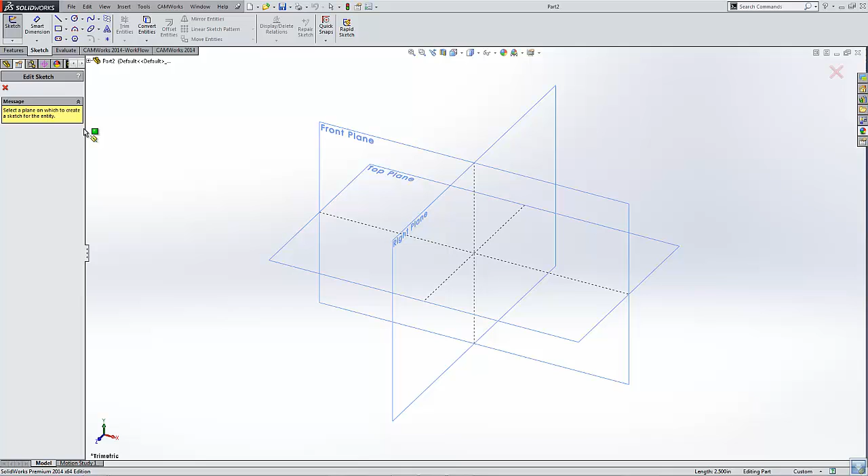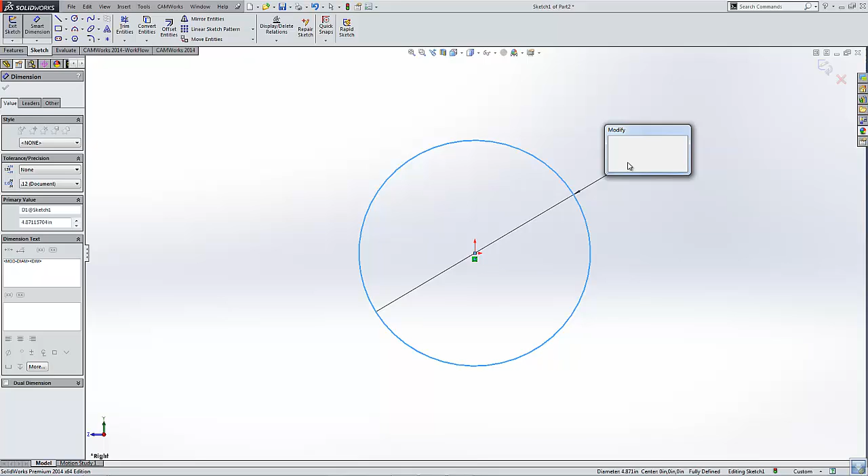So first thing we need to do is open up a sketch. Let's open one up on this right plane over here. See if we can normal to this right plane. There we go. Okay. So first thing I'm doing here is I'm creating the diameter for the cylinder which we will wrap the features around. Call it a 6-inch cylinder. And we'll come back over here and extrude this as a boss. Say 12 inches long. There we go.

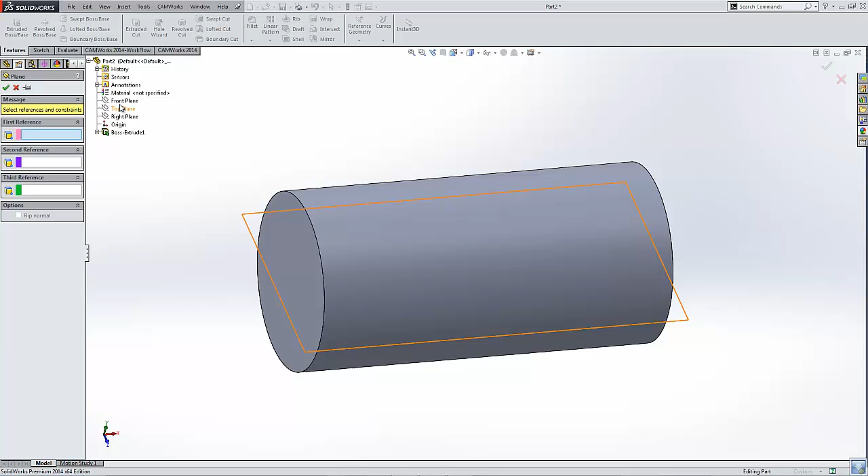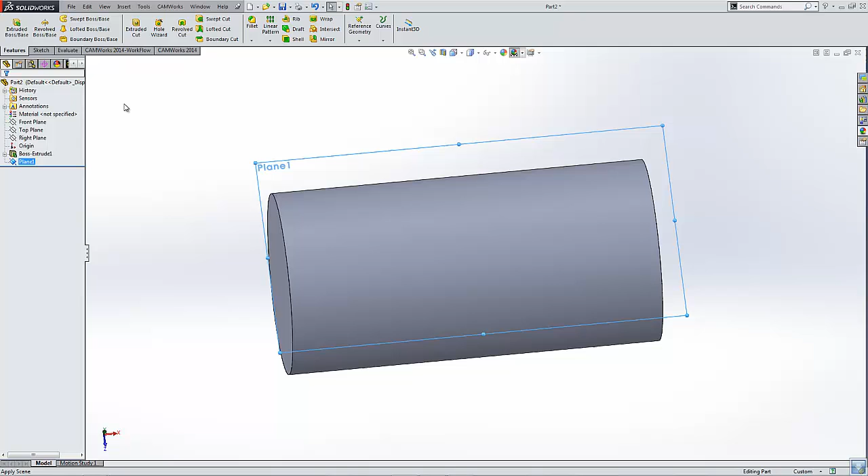So, new part. Need to add a few things here before we can start putting some toolpath on. Very first thing we need to do is get a reference plane that's tangent with this upper surface here. So our first reference is going to be the top plane, and we'll make a parallel mate. And our second reference is this outer diameter, so here we have our sketch plane tangent with the perimeter of the part. Make it a little easier to see there. Right now I'm just changing the color of this face.

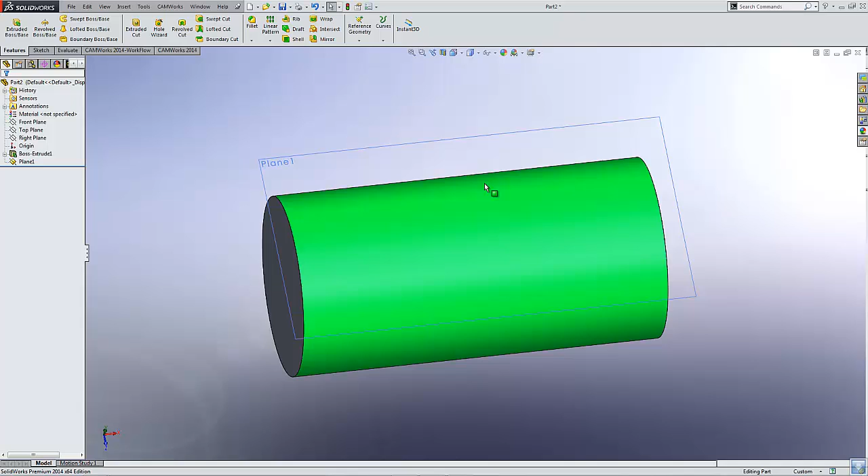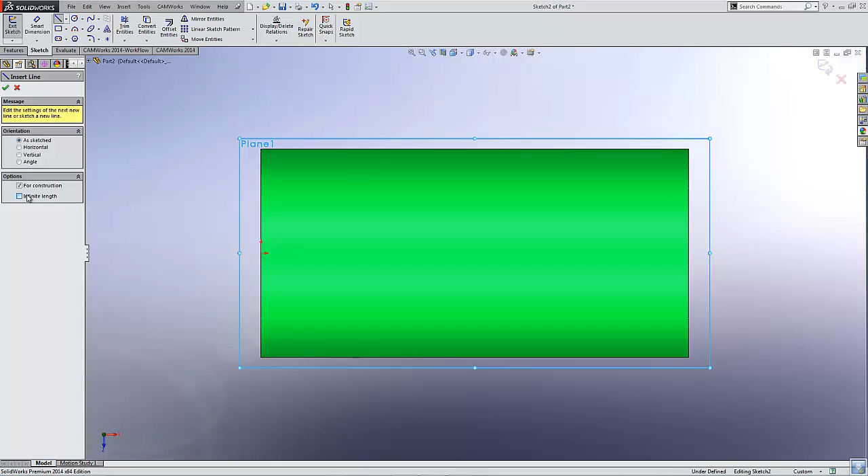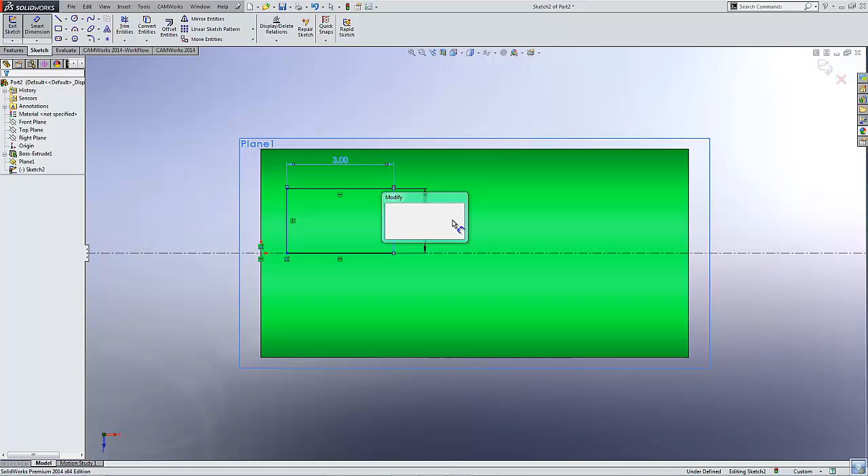Okay. So, what we need to do now is on our new sketch plane, we'll go ahead and open up a sketch. And I'm a big fan of starting out sketches with center lines. We'll go ahead and make a horizontal center line that intersects the origin. Now we can start drafting our features and contours. So I'll make a quick little box here and give it some dimensional information. So 3 inches wide and let's say 2 inches tall. And we'll go ahead and fillet all the corners with a 0.250 radius. So what I'm doing here is I'm modeling what would be the hypothetical top edge of the rotary cutter.

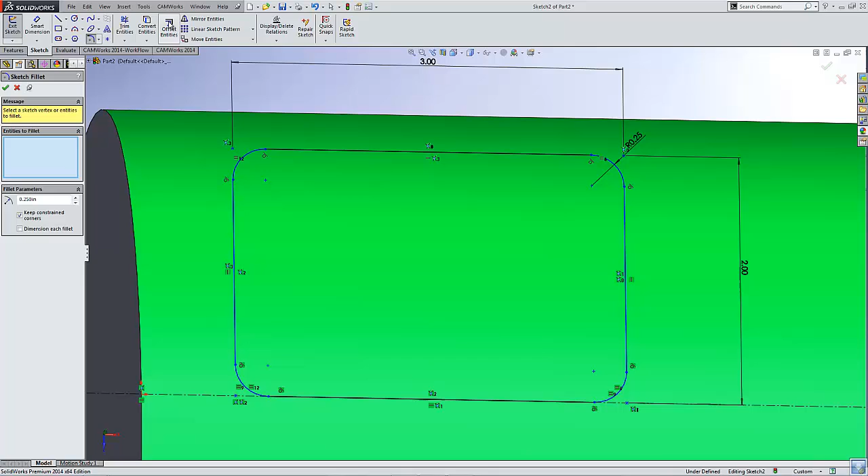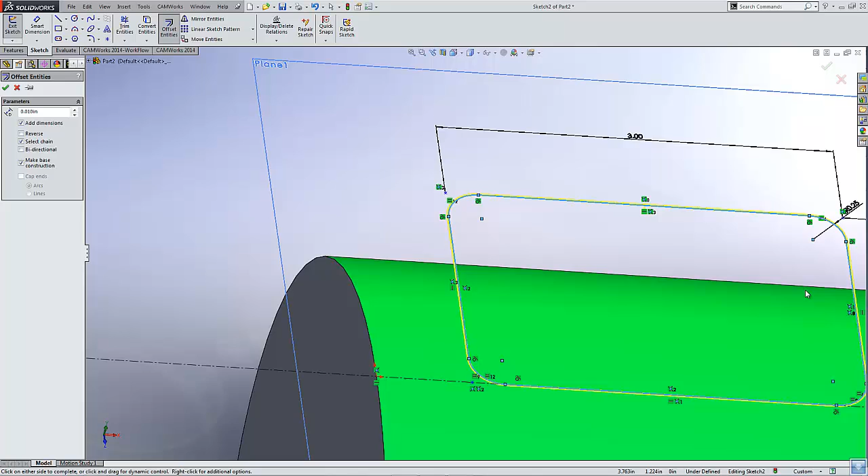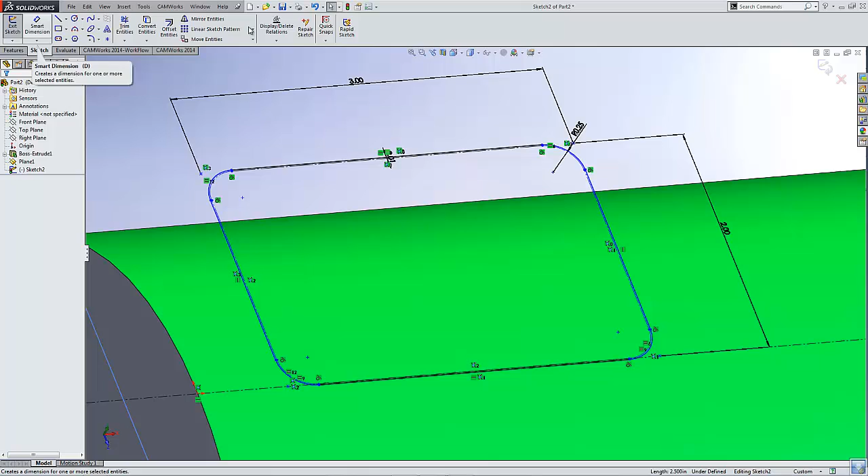So what I want to do next is select all this geometry that we've created, and I want to create an offset of about 0.010 of an inch. That would be the theoretical flat on the blade that you guys would sharpen by hand after hardening. So we'll go ahead and exit the sketch. Oops. Let's do that one more time. So offset that entity 0.010 of an inch. Hit the green mark. Select chain. Offset. That's what I wanted to do. Turn the base construction off. So now we have two profiles.

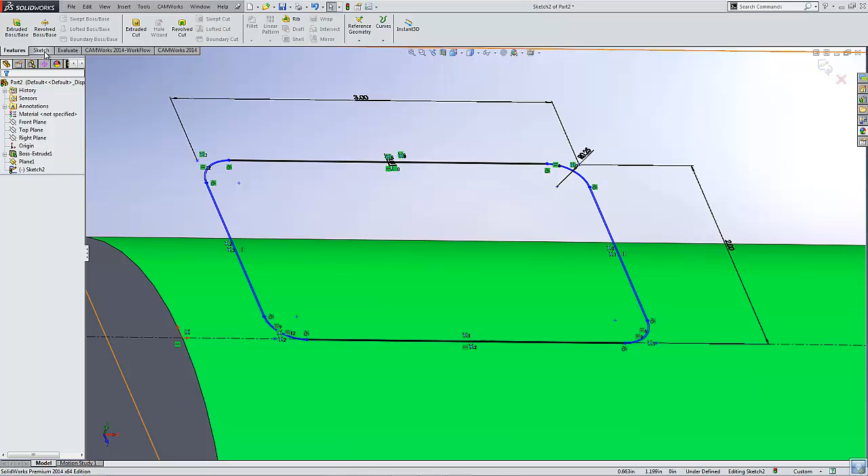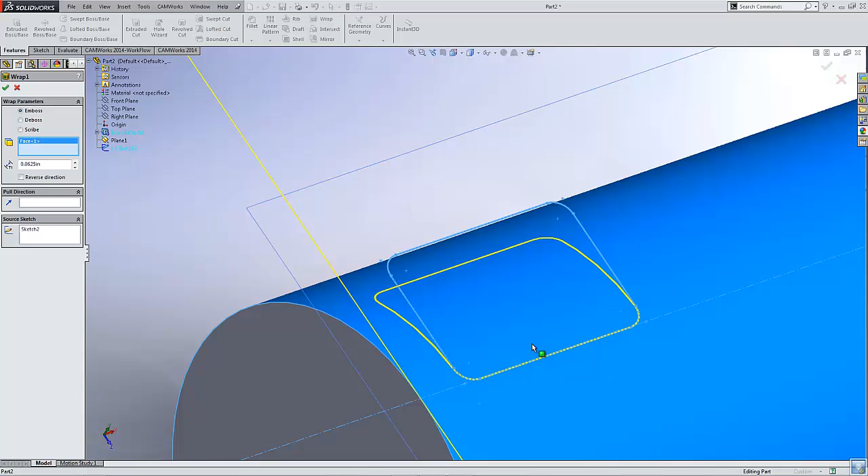So now we need to exit the sketch and create this wrapped feature. Using the wrap command over here on the feature tree, now it's asking which sketch do I want to wrap. So we went ahead and selected our source, and now we need to select which feature we're wrapping everything to. You can see right there is a nice little marking of the contour that we're going to make. And here is our extrusion size, so it's going to project up from that surface 62 thousandths of an inch. So now we have some features we can start working with.

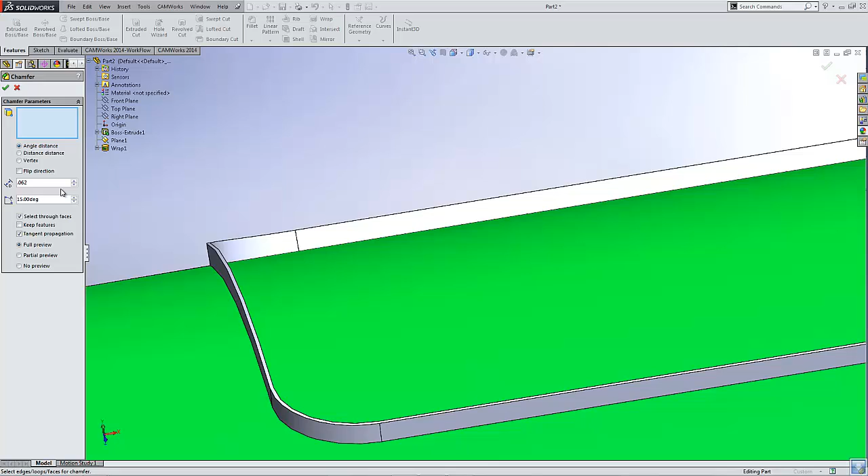This is enough to generate a toolpath on, but if we wanted a more accurate model with those 15-degree tapers on either side, what we could do here is just add in a chamfer. Let's say it's 0.062 tall and it's 15 degrees, and we'll go ahead and chamfer this entire edge on the inside. And you can see the projection of what that would look like. This isn't necessary, but it does help and makes the model more flexible later on down the line.

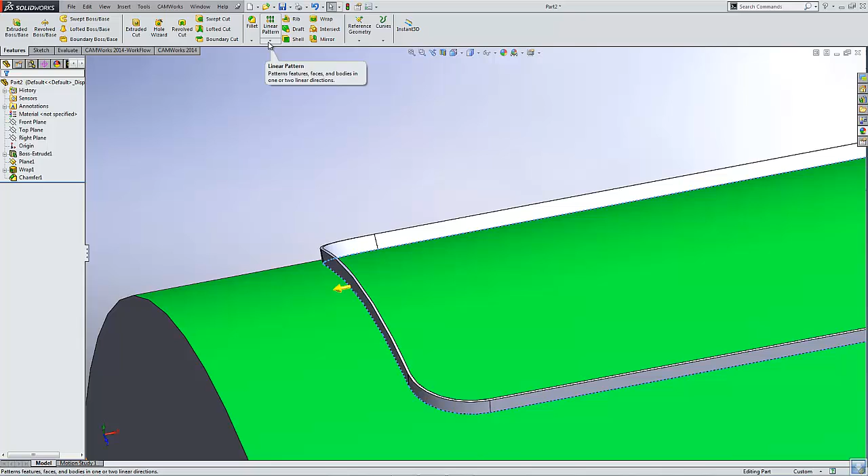So we'll do the same thing by selecting the loop on the outer edge and chamfering the outer side as well. We'll flip the direction of the chamfer. There we go. So now you can see a nice 15-degree edge on that.

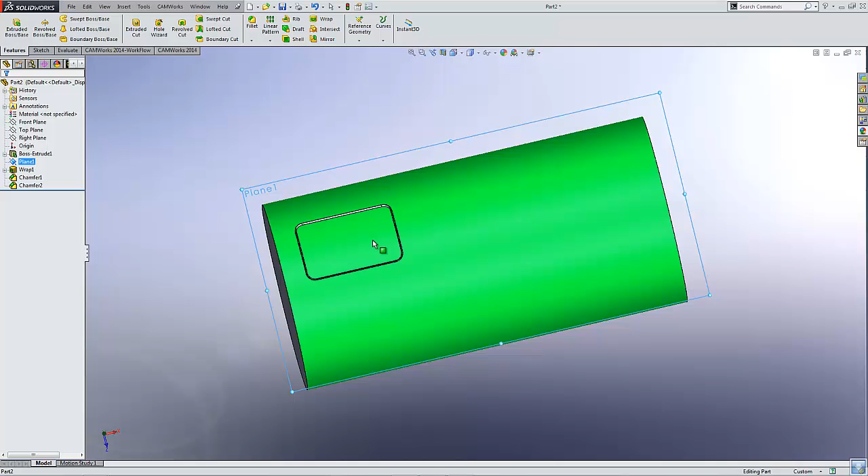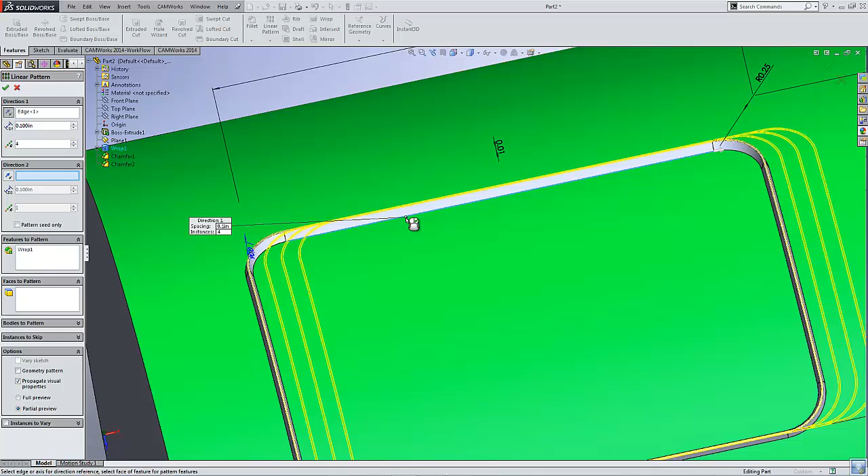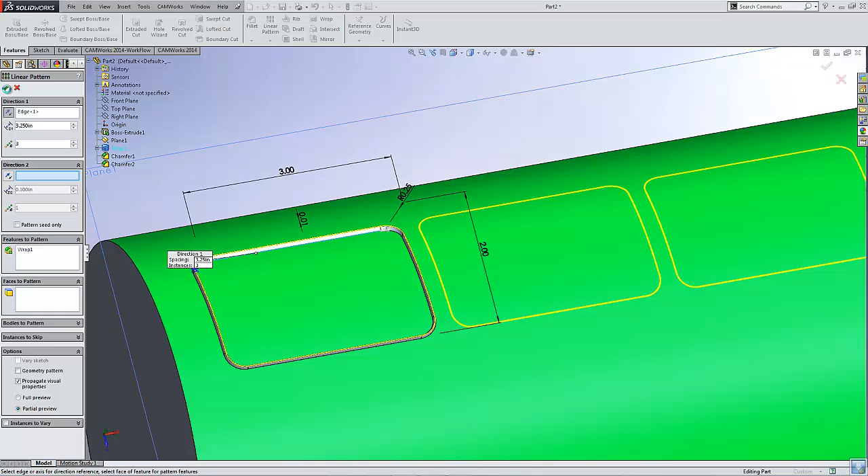So a few things we can do at this point. I would probably start by patterning all of these features here. We'll make a linear pattern of this wrap, and we'll just populate one entire row. So my wrap is what's being patterned. I want to pattern it along the direction of that edge with a 3.25 spacing in between everything. 3.25. It looks like we get just about 3 instances. And we'll do the same thing and chamfer the inner edges too. So now we have a couple of features that have been populated.

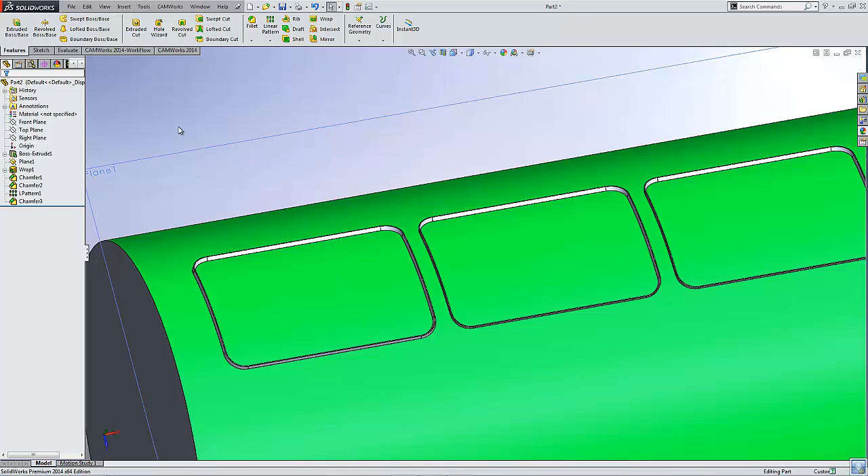We can hide this sketch plane so we don't need to look at it. And we're ready to start putting some toolpath on here. Now we could wrap this around rotationally too, but we can take care of that in CAMWorks. So a few things we need to do before we get started applying some machining here. Very first thing is, since this is a 4th axis feature, we would need to identify a coordinate system here. It just helps give CAMWorks a rotational counting point.

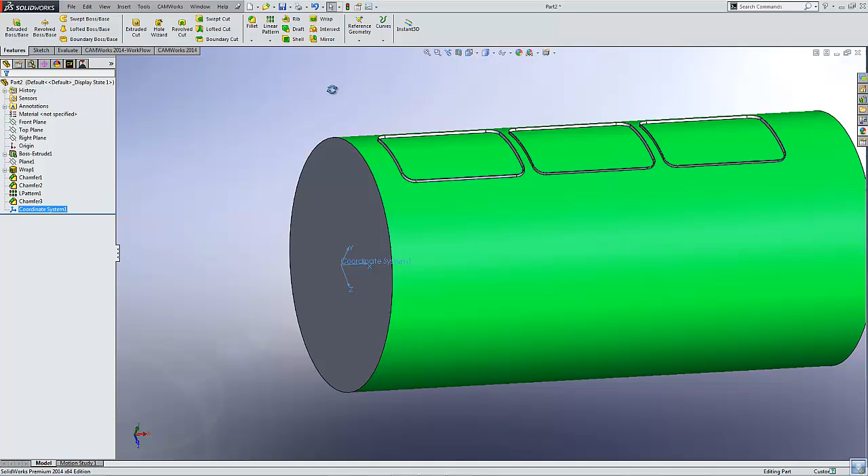And we also would benefit from having a stock sketch here. So I'll go ahead and put a new sketch on this face on the side, select the face and convert the entities to project that edge. And now we'll offset that edge by 0.062. And here we will make the base construction since we only want to use that outer profile.

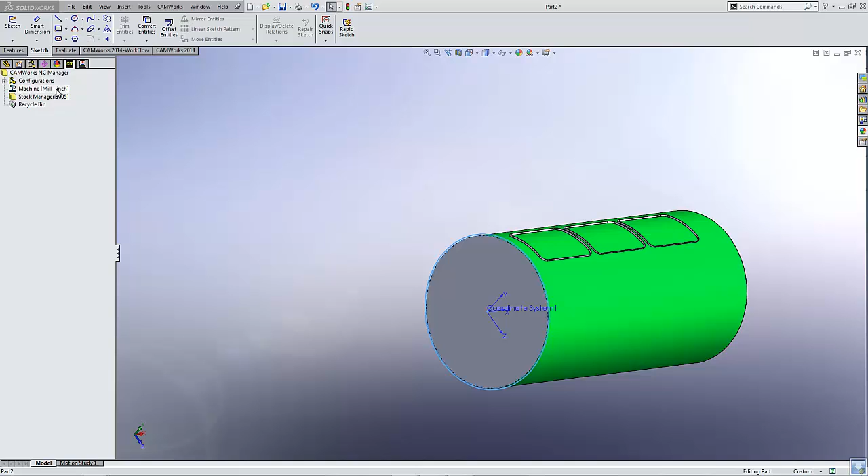Exit the sketch and give it a name. Call it stock sketch. Okay, so now inside of the CAMWorks menu, we can start applying some parameters here. So I'll get my machine set up by double-clicking on the machine node. And here I can select which machine I'm using, which post-processor I'm selecting.

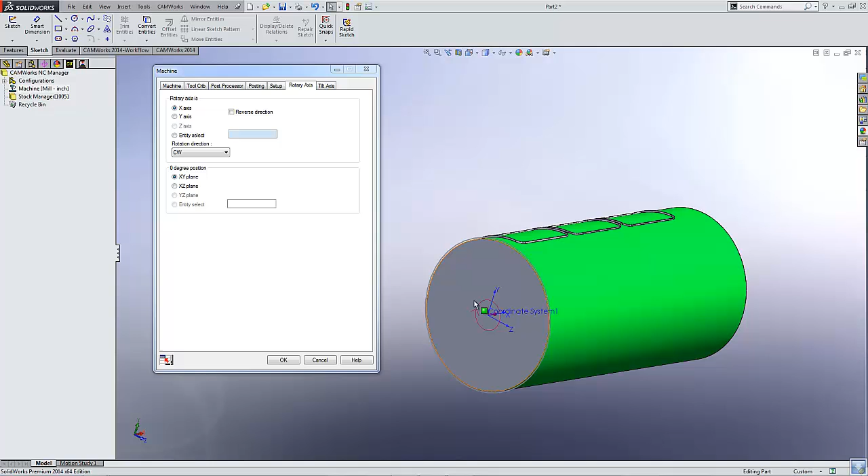What's important here is on the setup page, this is where you call up what type of indexing you're doing. In this instance, we're doing a 4th axis index, and we want to input our coordinate system here so we can give us a good counting basis. Okay, and the rotary axis is around X. You can see our little arrow here showing which direction the rotation will be.

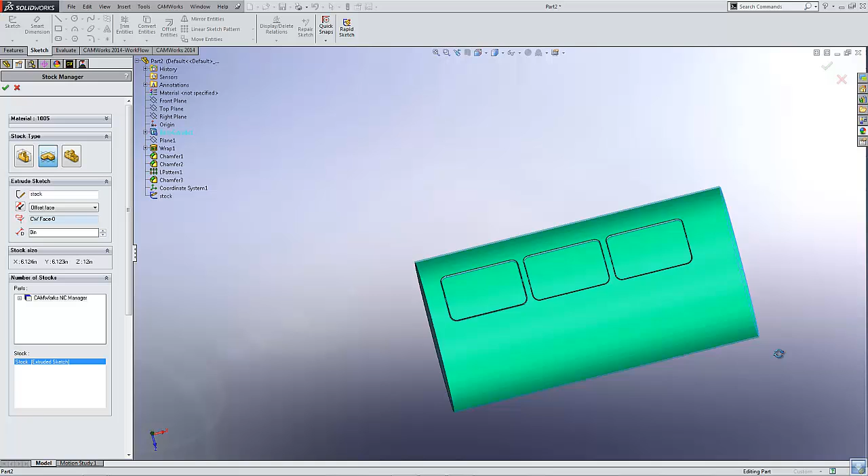And our stock manager, double click on that, and here we'll select our sketch type, extruded sketch. We'll select our stock sketch and give it a boundary condition. So now we have a nice superimposed cylinder that's perfectly within that sketch boundary. Okay, so now we're ready to start putting some toolpath on here.

I'll start by putting a setup in the feature. It doesn't matter which direction it is as long as it's perpendicular to this outer surface. And what we're looking here is to add in a wrapped feature. So the first thing we're doing is wrapped pockets. We'll go ahead and select this inner edge on all 3 of these sides.

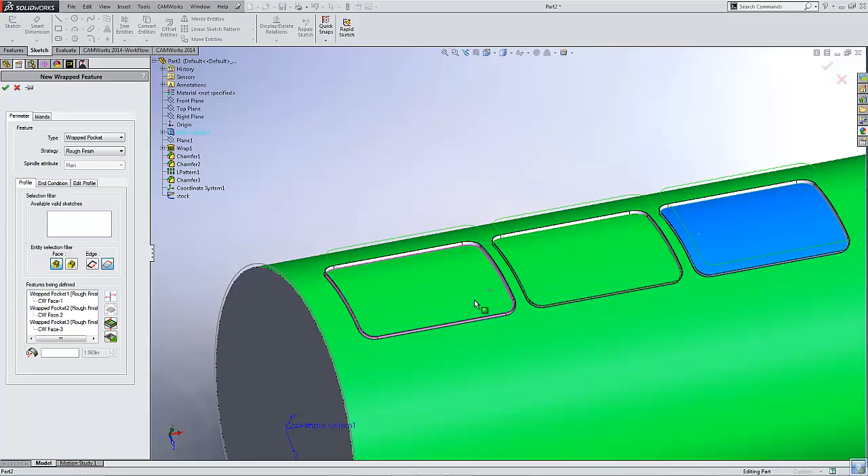Let's see if I can change the color of this face here. Maybe not at the moment. We'll come back to that.

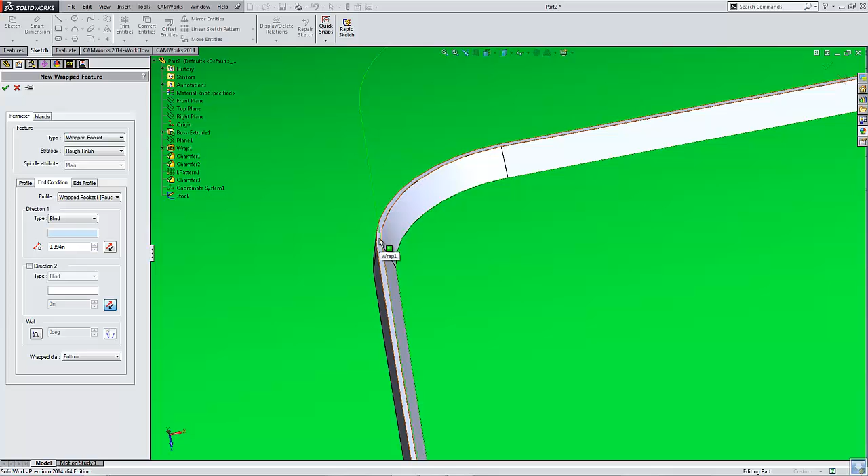So you can see this little green projection, right? Now we want to say how tall these wrapped features are. We want them to go up to this height, and we can also chamfer the walls while we're here. It's a little difficult to see just because of my poor choice of color. Sorry about that. So this way we're also giving these features the exact criteria that they're all meeting with.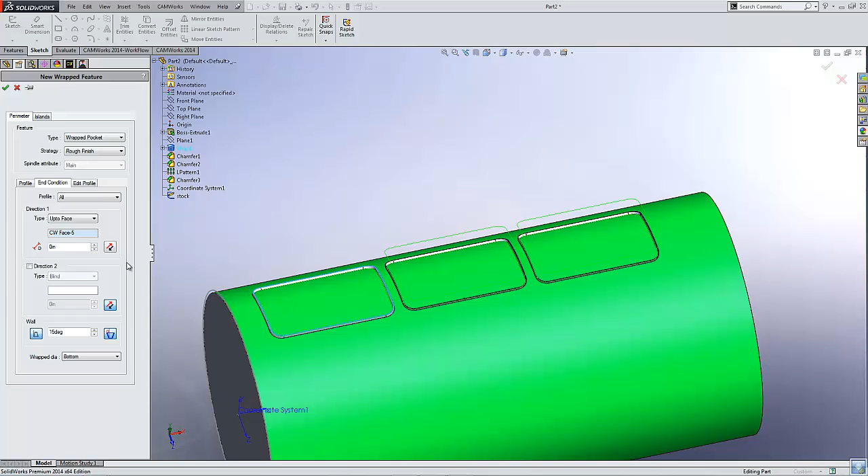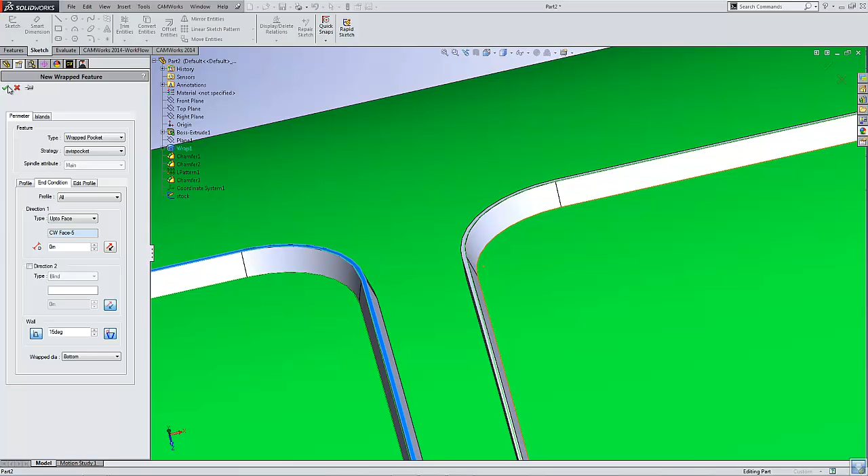So I need to make sure I got all of these features in here. And they're all tapered, so they all look right. Yep. Okay. And I've already programmed a strategy in here, so that way we'll get us a good baseline on some tool information and speed and feed information. Let me go ahead and change the definition here for all the rest of these pockets.

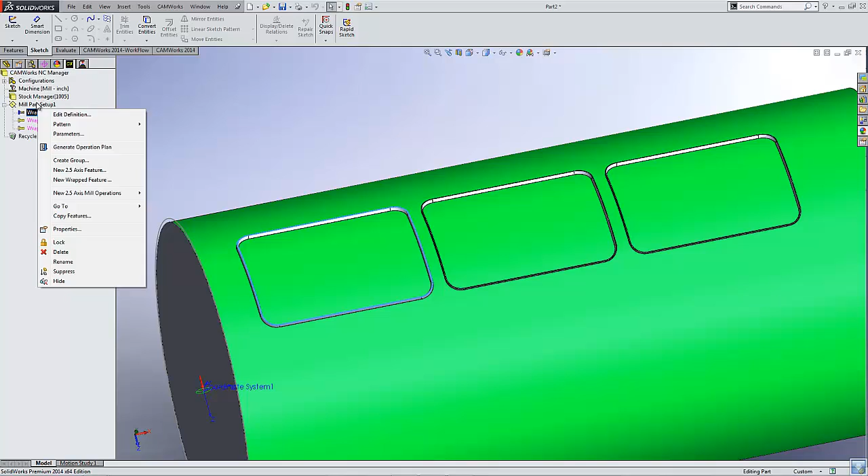So, with this Avis pocket strategy, I have a rough and a semi-finish operation, as well as a custom definition for a 15-degree cutter. So the 15-degree cutter will come around and finish off the taper on the inner wall of this pocket. So by generating the operation plan, I'm invoking the database for any information it has about speed and feed and tool selection and contour information.

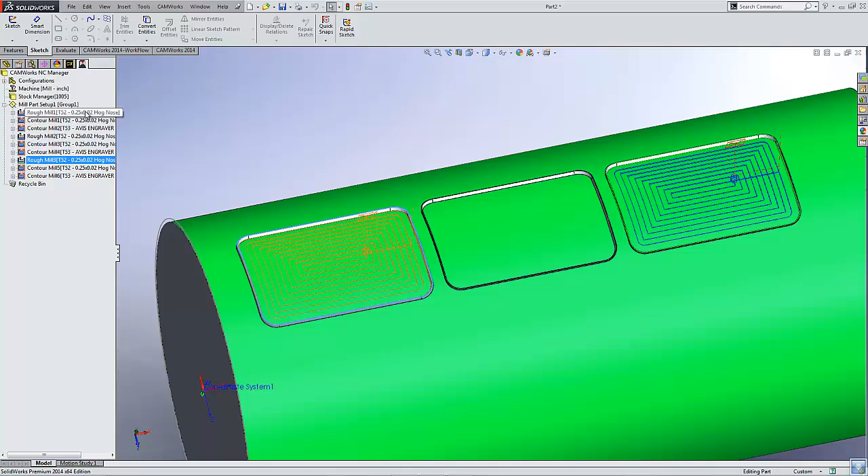So you can see our roughing sequences, roughing out the pockets over here. If we wanted to make any changes to what was automatically generated, we can always come in and double click on the operation right here, and we can make some changes. So let's see, if we want to put a radius on all these edges and link moves.

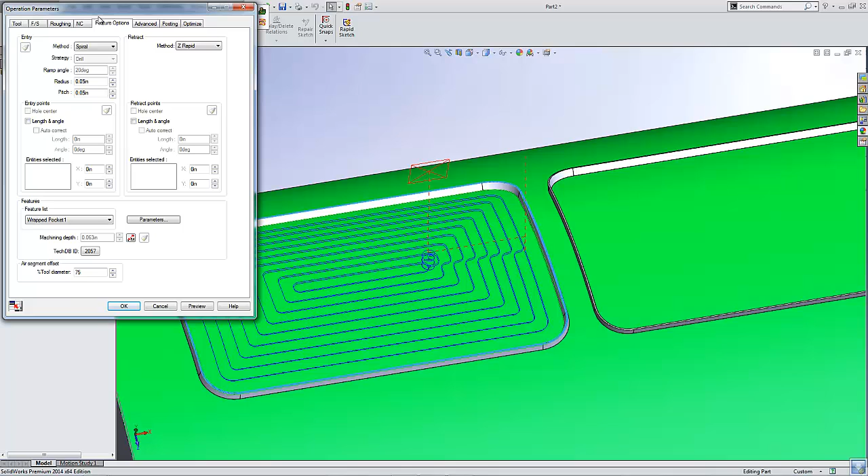So we'll go ahead and change these. We'll make some round and curved splines here and just give it a little bit of a dimensional value, so when I hit preview we can see the toolpath change and update based on that. So you can change your feeds and speeds and how you enter and exit the contour. All sorts of information can be changed within the operation parameters menu.

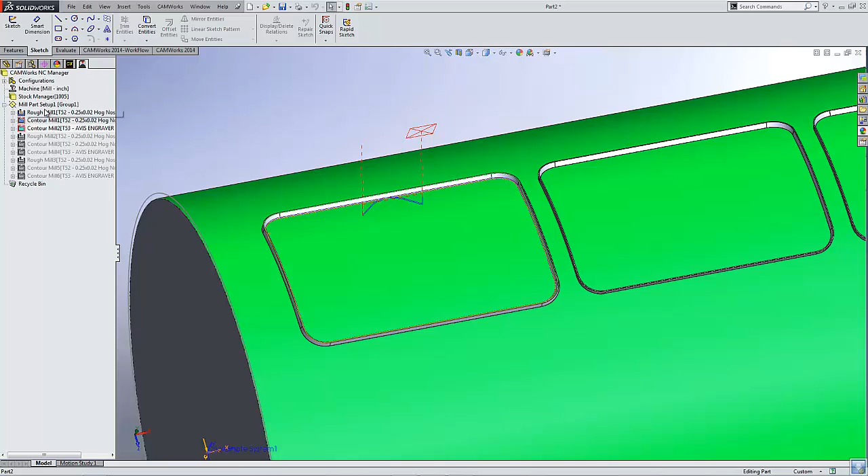So at this point we should have a pretty decent toolpath. We'll go ahead and just suppress everything else, the 3 copies down the way, so we can just see what the single toolpath by itself does. So there's our semi-finish and the finished contour mill. So go ahead and simulate what we have in this toolpath.

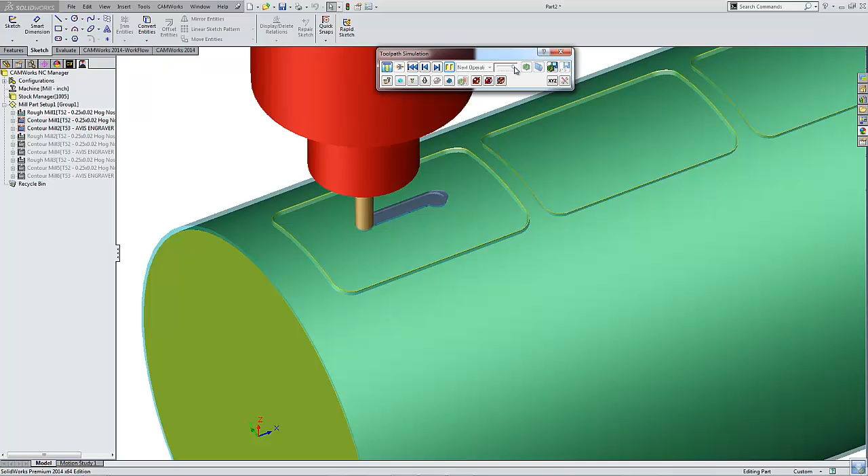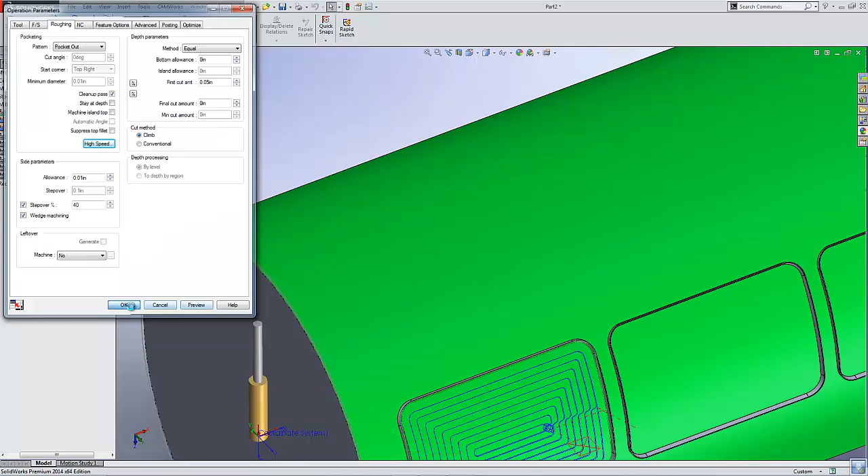So it's running a little slow just because of all the curves and contours we gave it. You can see it's starting to chug there right on the edges. That's okay. We'll come back in and change things back the way they were just so they simulate a little bit quicker without all those swoopy edges. So we'll just turn the high-speed options off. Recalculates the toolpath. Now let's see what we've got.

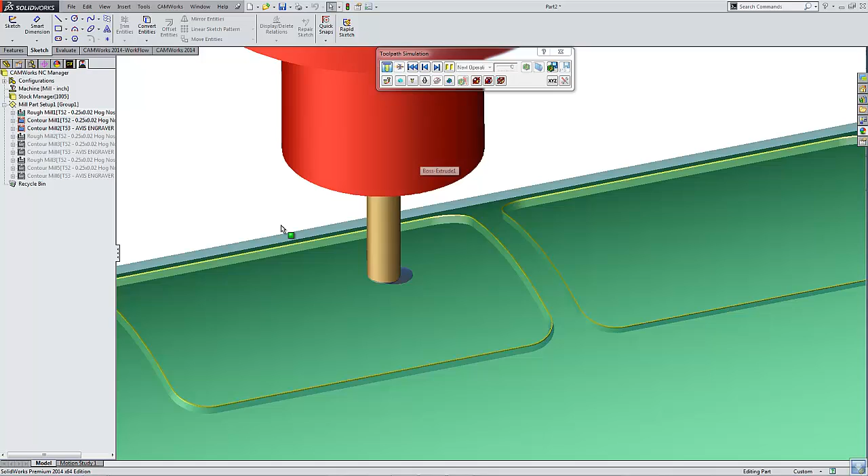So it'd be great if we could see chips flying and coolant spraying everywhere. But you get the idea. So we'll turn up the speed a little bit and hustle through this operation. Exciting stuff, I know.

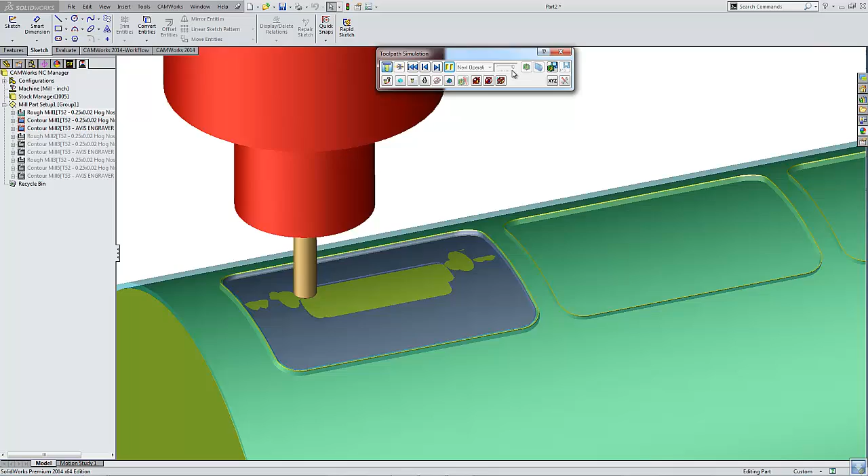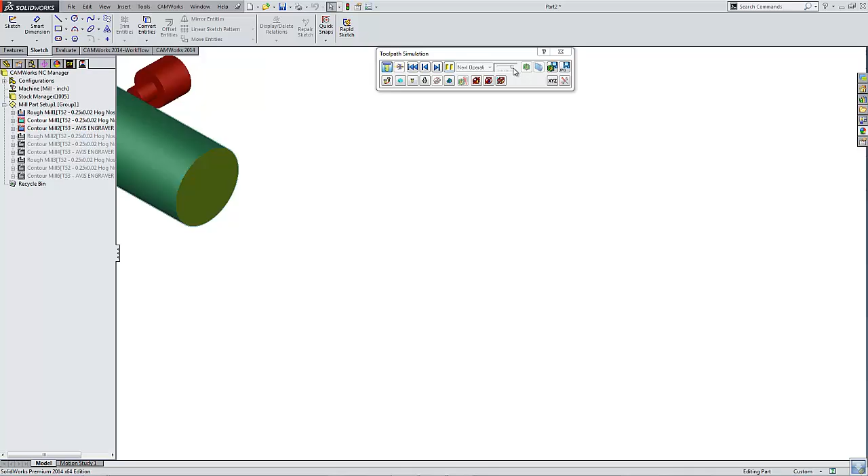And the next operation comes in here with just a quick little semi-finish pass. Just trying to pause it so I can speed it up a little bit. I know that doesn't make a lot of sense, right? There we go. Just making a quick little contour pass on this toolpath right here.

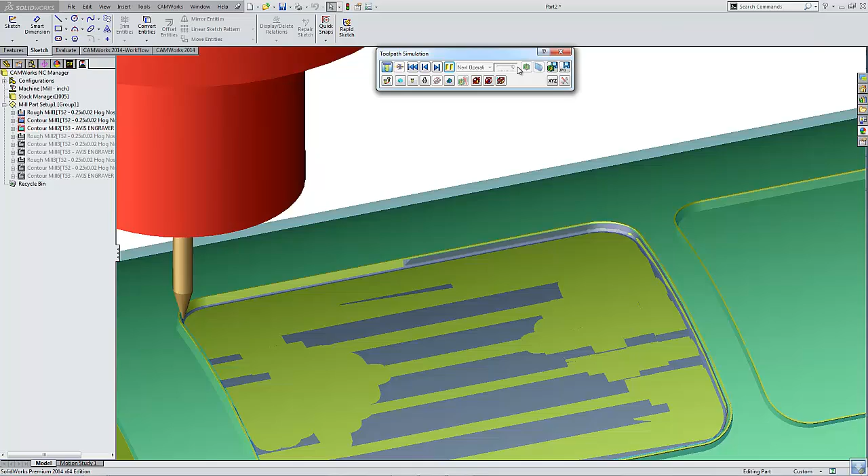And then here comes that nice little engraver tool. Looks familiar, right? So I've custom defined this tool previously inside of CAMWorks. It's just as easy as creating a revolve section and inserting that into the database.

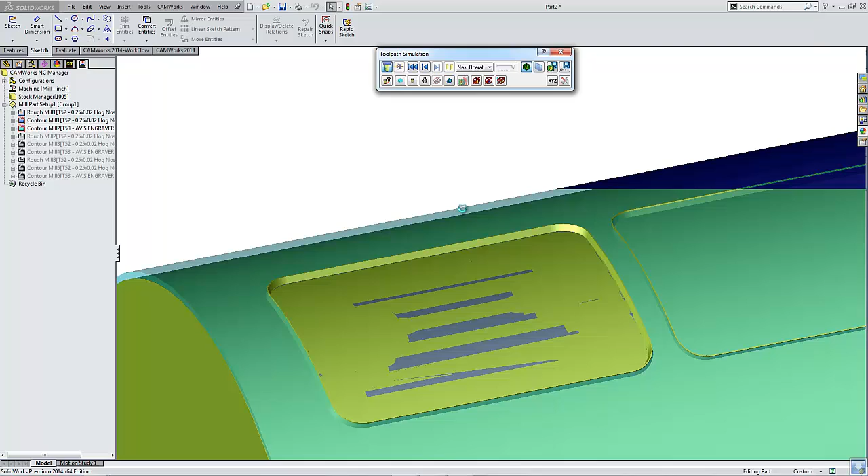So after a quick little run to see what the results of this toolpath will be, we'll check the show difference comparison here, where it shows where any faces may have been overcut or undercut. Here it's overcutting just based on the direction of the toolpath, so we could always come back in and change that around, but it's a quick little comparison, shows you how things progress and work down the line.

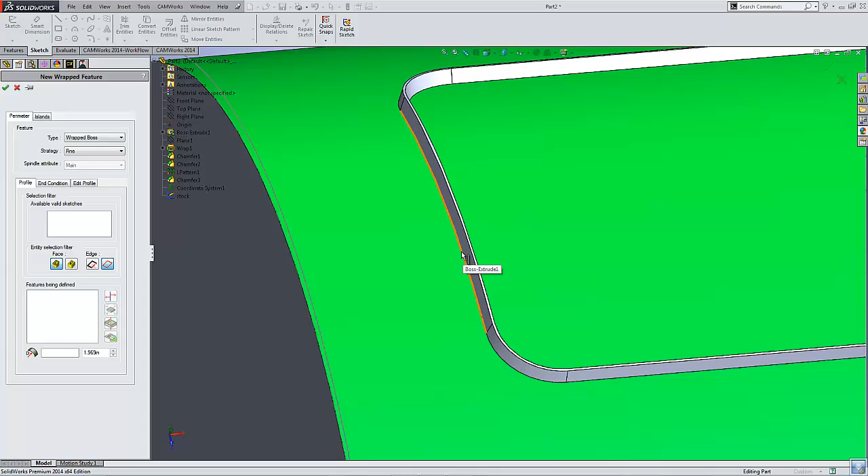So what else can we do here? I'll add in the outer perimeter here just as easily. So we'll add a new wrapped feature, but instead of a wrapped pocket, we need to add a wrapped boss. And we'll select the outer bottom edge of the part. You can hardly see a little green projection on there. Sorry about the bad color choice.

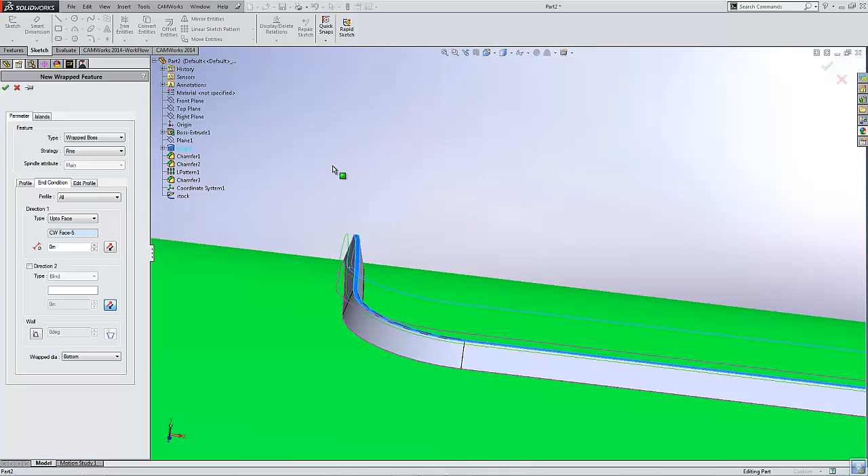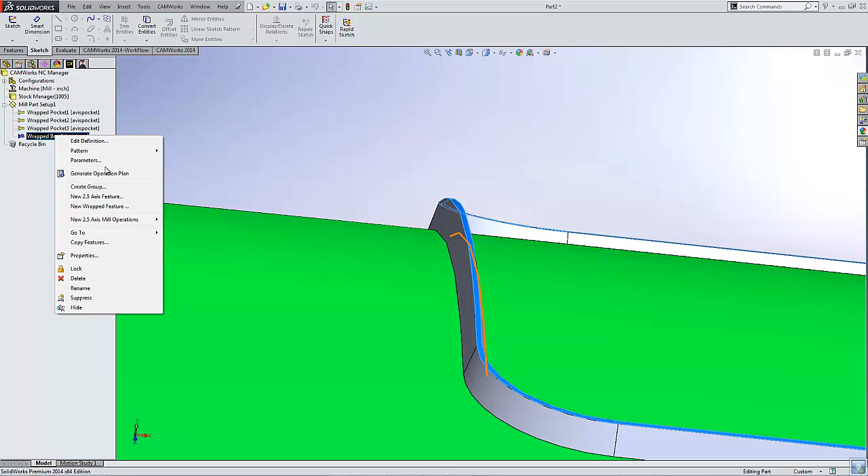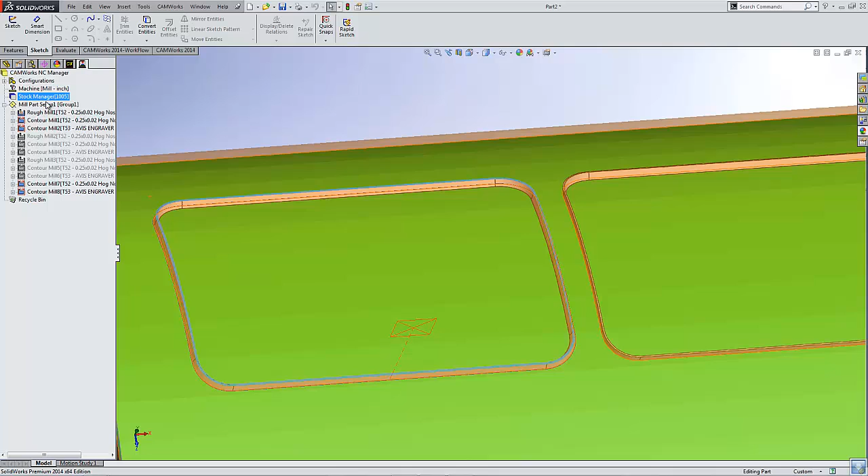So generating the operation plan, and then generating the toolpath will get us to some familiar places. So we got the toolpath on the outside, a rough and a finish. We'll go ahead and simulate everything that we have here now. Just go full speed to the end, since we've seen this all before.

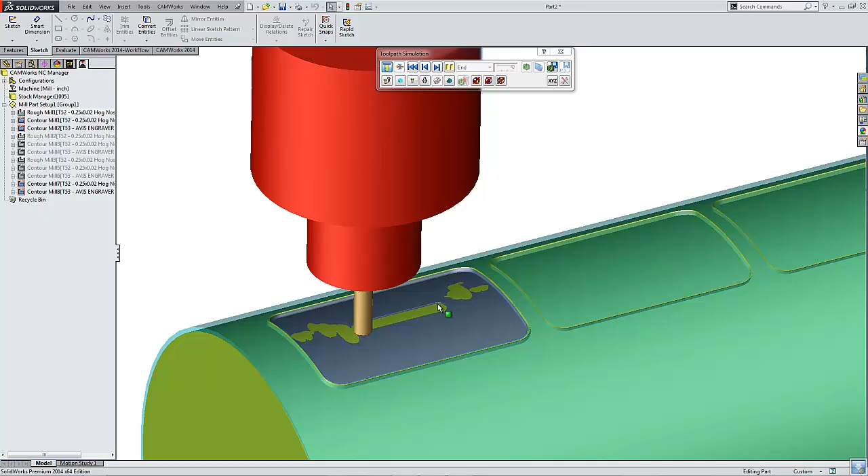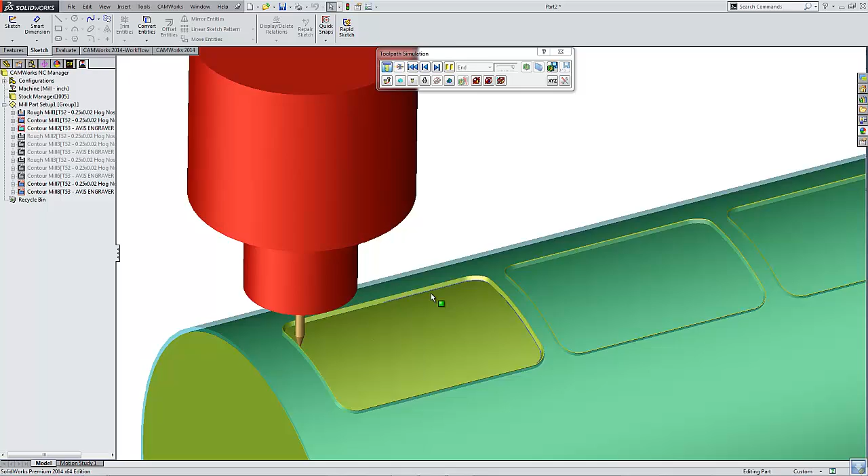Still finishing off the inside. And next we'll see a toolpath on the outer perimeter. And there we are.

So, what's left at this point? This is essentially good G-code, but then we just have to populate it along the rest of the assembly. We don't necessarily have to program every single individual feature and contour. We could just as easily make a pattern. So same thing as we did inside of SolidWorks, we could do a linear pattern, we could do a circular pattern around the outer perimeter here.

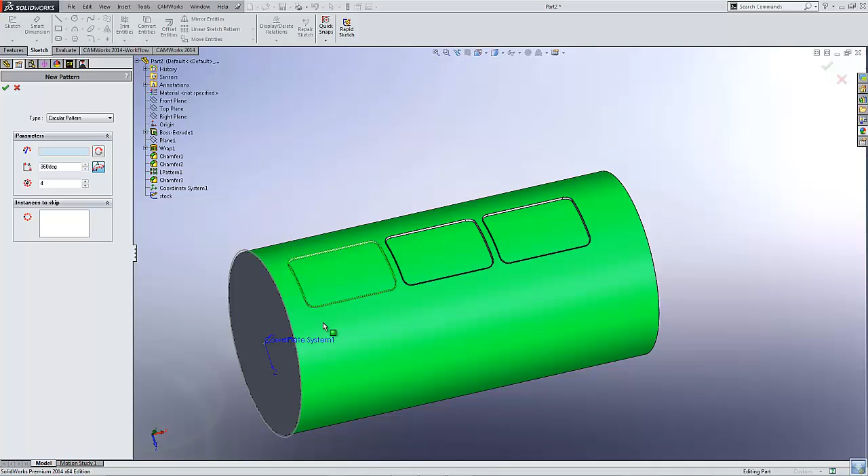You can see a couple of green bosses here, and let's go ahead and pack that in. We'll say we want 4 instances. Yeah, that looks good. So after I've defined the feature for just one of these contours, we can populate it along the rest of the group as well.

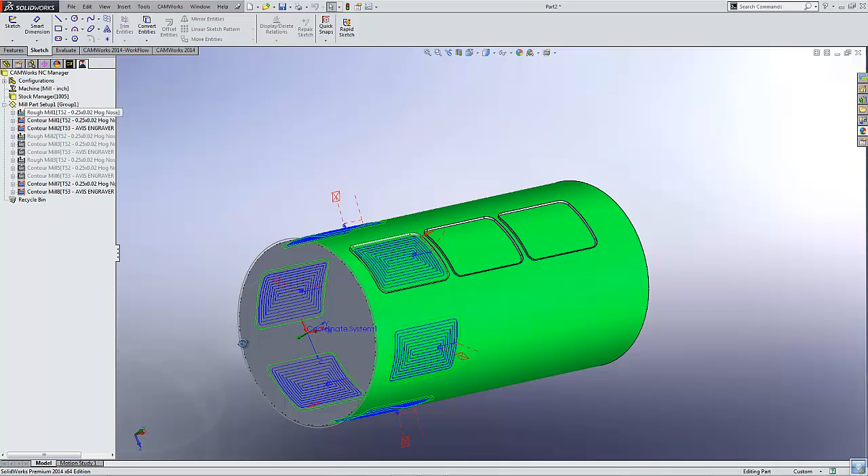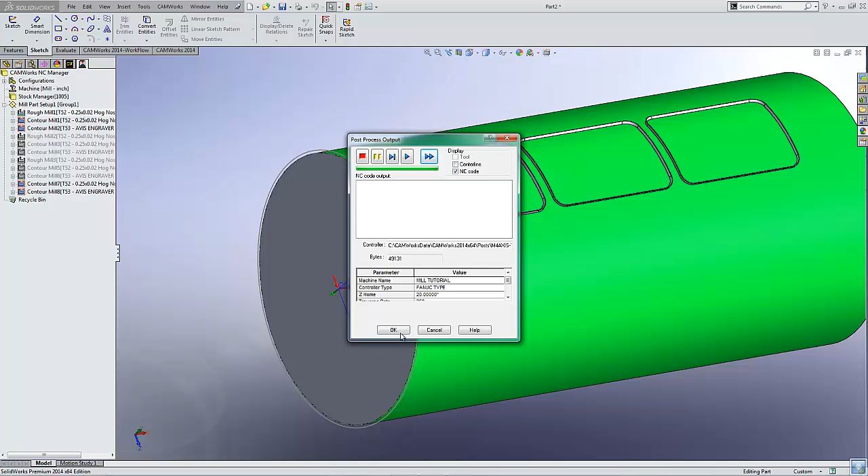So if I show you the rough mill operation here, just by adding that pattern operation, it's gone ahead and populated across every other setup, every other face where we demanded a pattern. And this, at this point, is ready to get sent out to your machine. So we can post-process G-code, check it line by line if we want, or we'll just fast forward to the end and see where that gets us. And bam, we're ready to go to the machine, start to finish, programming some G-code.

But wait, there's more. So you said you do a lot of programs in a day. You probably don't want to do that over and over and over every single day. What's nice is, now that we've had it set up, now that we're still inside of the CAMWorks, SolidWorks flexible dynamic work environment, we can just make a small change to this sketch.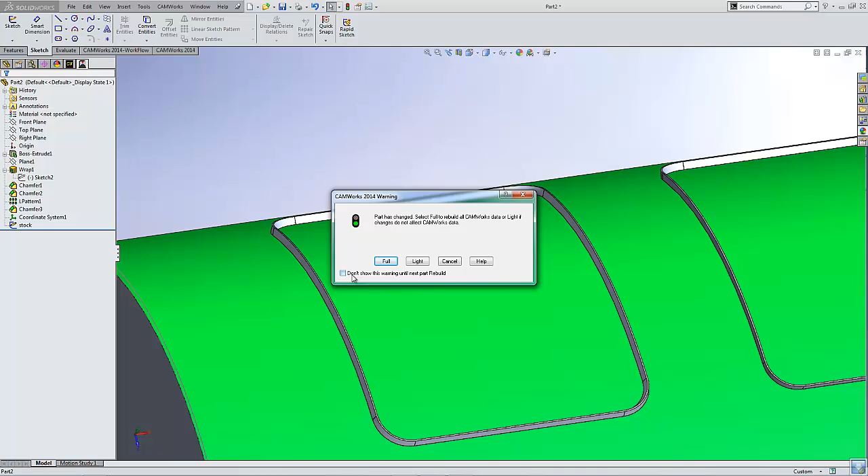So, the idea with CAMWorks being feature-based and model-based is that when the feature itself changes, the toolpath will also change. So you never have problems with the wrong toolpath on the wrong part. As soon as I come back over to the CAMWorks operation tree, it's going to tell me, hey, something has changed about your part. Let's go ahead and give it a light rebuild here. And this will recalculate the toolpath for the new features just based on the new bounds of the contours that we gave it.

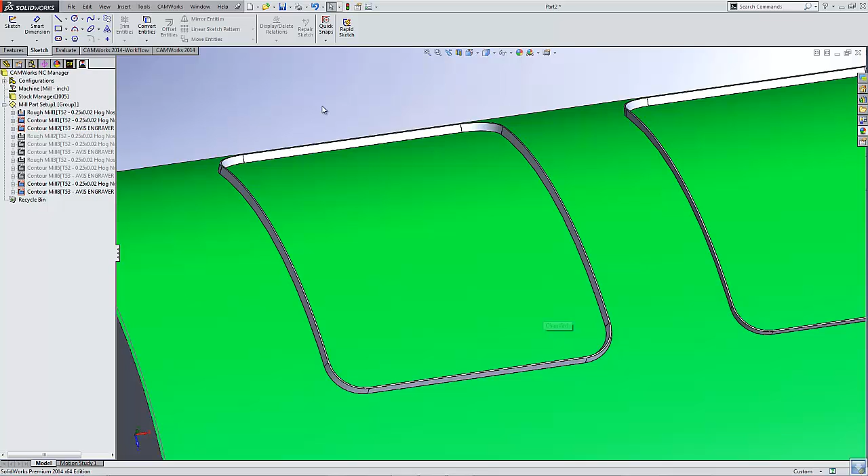So now that I've programmed everything successfully for one contour, we can see where we're at with everything else. So we can see it's regenerated the toolpath for my individual little feature here. And that was just a quick model change, and we have 2 separate toolpaths. So that's the gist of it, programming wrapped features only using simple 2D sketches.